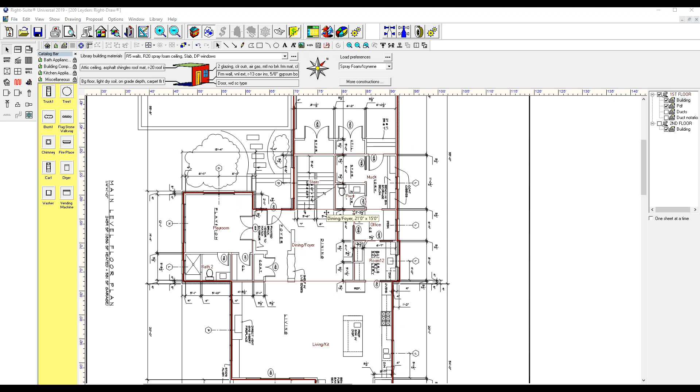One thing I'm going to do here real quick, go into the garage, and I'm going to say no for including calculations, no for heating, and no for cooling. There we go. All right, that is the first floor. Now I'm ready for the second floor. So I'm going to keep my PDF in the background there. Click on for the second floor. Let's go ahead and

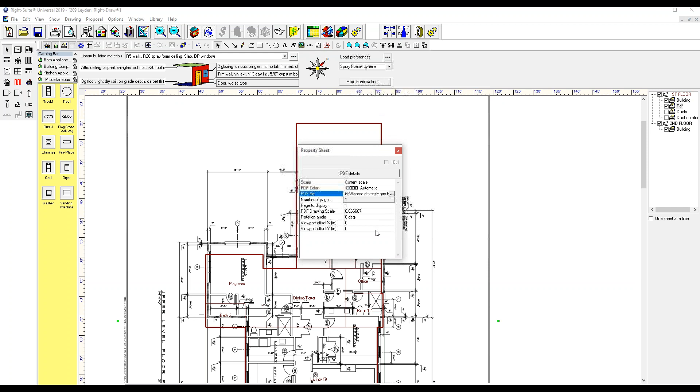There we go. And it starts rolling right along. It looks like the lagging is not bad at all now. I can deal with it really good when there's hardly any lag. Then it's like a house just comes right along. I see from there, I gotta fix that one up.

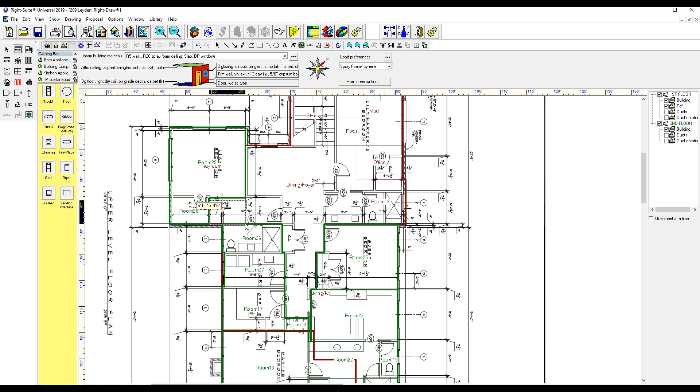Oops, there we go. Bring that all the way out there, and then we're going to connect both of those together. And then I'm making sure at all times that I'm always on my second floor. Super, super important. You don't want to start drawing over top of your first floor again.

Now it looks like there might be a little bit of an area. I'll have to double check that on the first floor when I get to it. You see the little bump out area right there? It's super easy to bump a section out and then forget that it's like that, and then all of a sudden it just doesn't match with your second floor.

Now this landing area right here, I'm going to go ahead and put it all together with the hallway. Because it's such a big area, we're going to put a drop in there, but we don't need many drops. It's a transient area. It's not an area where a lot of people are going to be staying in. It's going to be an area where people are mostly walking through. All right, now I'm going to click on all those and bring those suckers together.

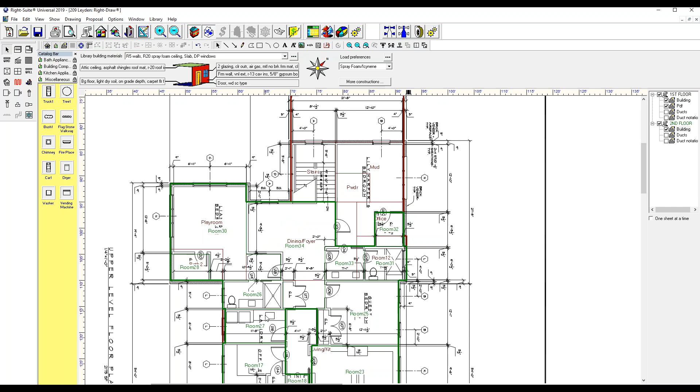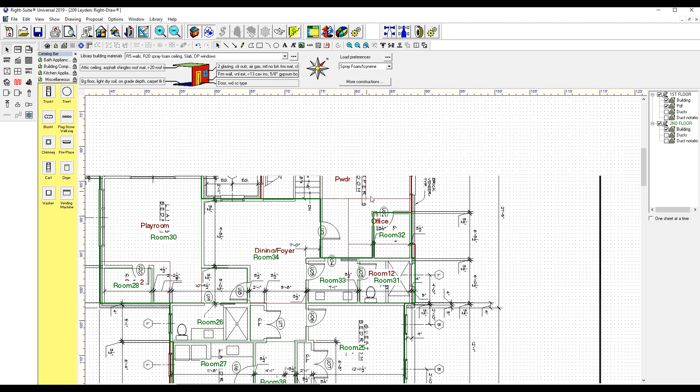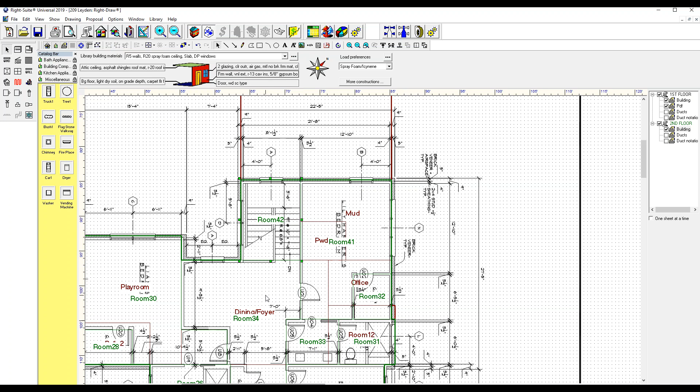All right, all we have is this one little area up here left to do. So let's go ahead and put that there. I'm going to combine this with this. And for this one, I'm going to make the room for the stairs, but I'm going to combine it with the hallway here. All right, so now we have the second floor complete.

Let's go ahead and I'm going to name the rooms now. So I'm going to turn off my first floor. And as you can see, we got kind of some jagged edges here, so let's tidy that up a little bit. So we got that fixed. Now I'm going to go back to my first floor. I'm going to check my situation with that little bump out area right there. So let's change our PDF again. And that does look a little bit awkward there.

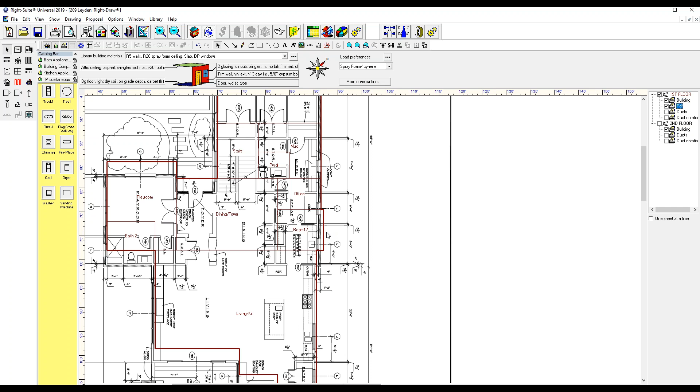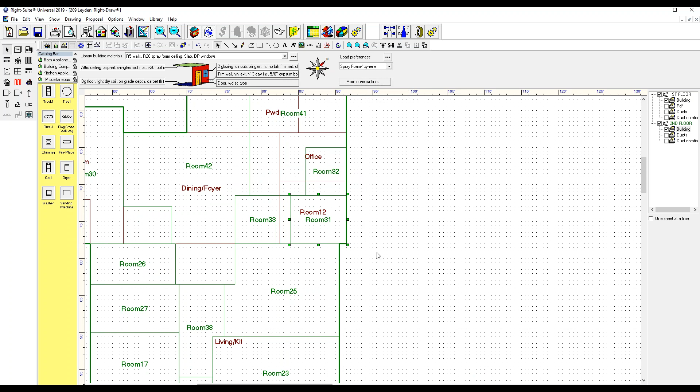Oh yeah, see, it's bumped out. It doesn't need to be bumped out. It comes out just a tiny bit, but it can match up with the other. So let's bring that back. Put that there. And then for the second floor, I'm going to bring that back as well. Boom. All right, now let's go ahead and turn the first floor off. Let's look back at our second floor. I'm going to combine these areas together. Those are still part of the hall.

Now on another screen, I'm looking at the PDF and I'm just going to begin naming each of the rooms. This one I'm going to call stair and hall. Stairs and a hall. And let's see, we got a bathroom and a closet. Some of these smaller rooms I like to abbreviate. There's no need to be hardcore with your naming on it, just as long as you can easily tell from your Manual D when you're looking at the sheets what the room actually correlates to.

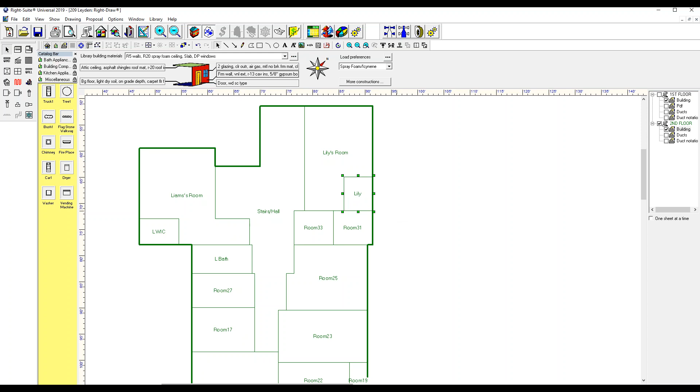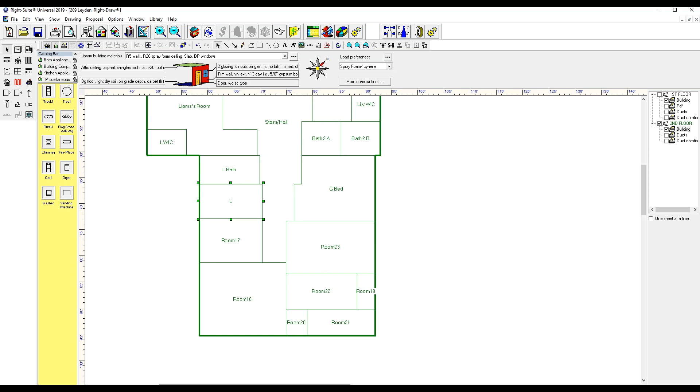Same thing with here. And this one, I'm just going to call this bath 2B, and then this is going to be bath 2A. Guest bedroom. And then laundry, office. I must have an office somewhere else. I'll call it office 2. And this is going to be the master walk-in closet.

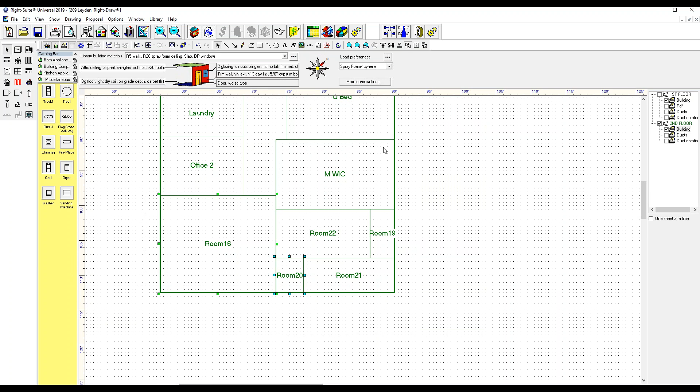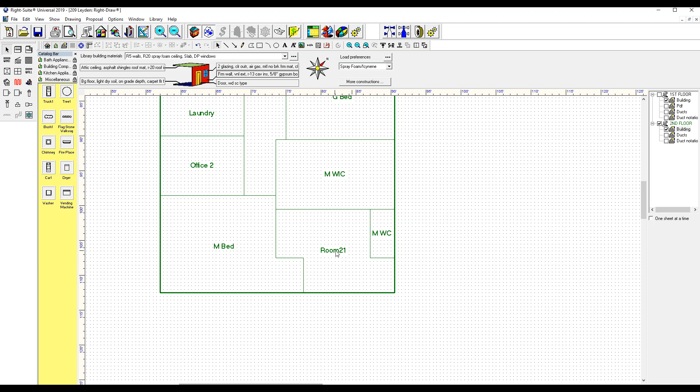This little tiny closet, I'm just going to combine in with the master bedroom. But the little toilet room, I'm definitely putting a drop in there. So that's going to be master water closet. And this is going to be part of the master bathroom. Let's combine that together. Master bath. And we got our second floor done.

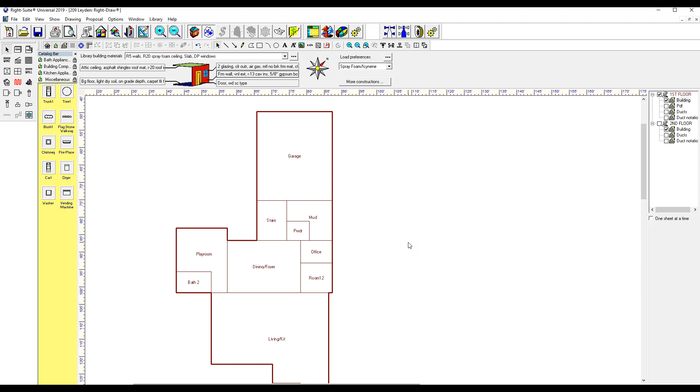All I got to do is just go over and add in my internal gains and then also windows and exterior doors, and do that for both the first and second floor. And this one is complete. After that, I would size it. I would do my Manual S calculation on it as well, making sure that the unit that I select is properly sized for the house. And then I would draw my duct layout.